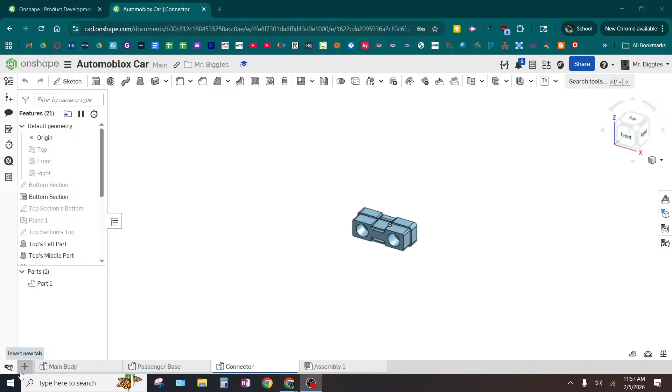So what we're going to do here is we're going to make a new tab.

So the passenger base, just to be clear, is this little plastic thing. The main body was like the section with the passenger. Some of you may have called it the passenger section. I'm going to call this the front section. So the main body, all right. You can call this next thing the front body or the front section. It doesn't really matter, but it's the front of the car.

So I'm clicking here, this plus sign, create part studio, and we can call this whatever, but it is the front of the car.

Okay, and I do want this to be oriented like this, where when I have it in the default front, right, top, I guess almost like corner of the view cube, it's in its natural position like this, where this would be the front facing part of the car, this is the side, this is the top.

So I want to do the same thing with the front section, and so it's very important if we do that, we're going to draw this initial sketch on the right plane. We're basically going to draw that profile. We're going to draw that shape, and that shape will then extrude, and that's going to give us the front of our car. So I'm going to make a sketch on the right plane.

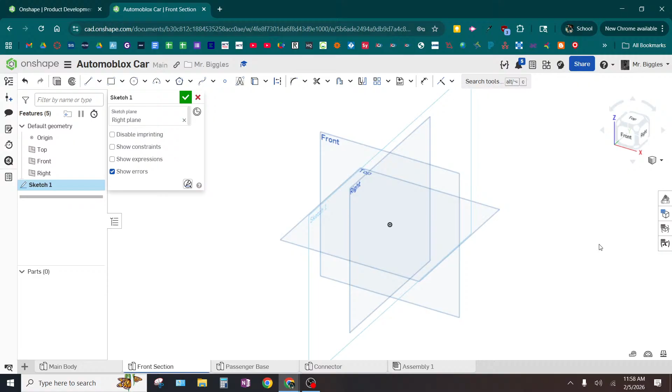Now, I want you to just kind of look up here and watch. I'm going to show you a variety of different ways you can do some cool stuff. Most of your cars, if not all of them, probably have some curves on the front section. So what I'm going to do is I'm going to show you some different ways to draw curves, and then it's on you to kind of make that work out.

For me, I got the bottom as flat. So what I can do is I can draw a vertical line, and I can draw a horizontal line. Easy, that's done right there.

Actually, I would have you do this. Draw your vertical line at a minimum. The height of this - what is the height of this? Measure it, get a number. But I want you to go check this because it should be the same height as this.

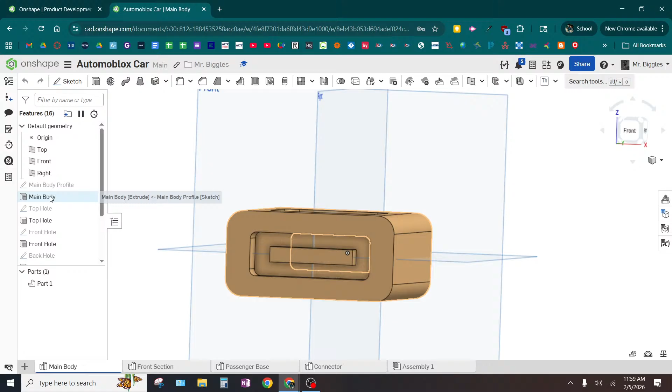In fact, for me, it's pretty close. I got 38 and a half, and that one was 39. So you know what, I'm going to just go with 39. If you want to make it the same number as this one, sound good? So I'm going to go make that the same height.

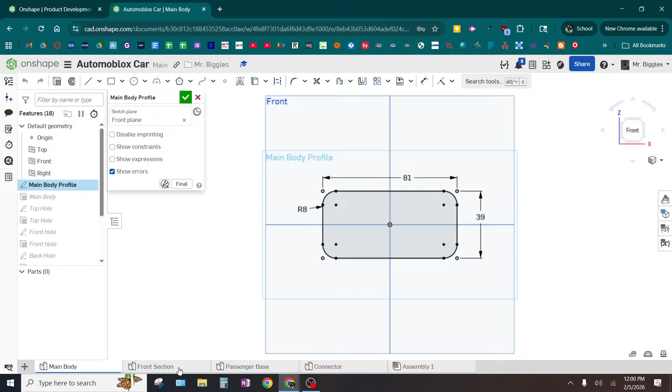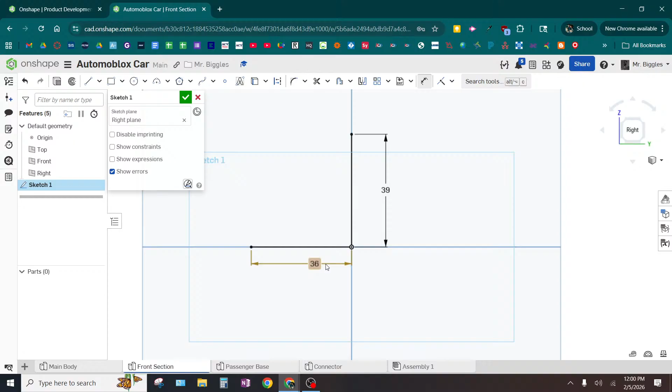If you have a flat bottom section like mine, you can draw that out and measure it as well. Not all of you have that though, so I understand if that's not an option for you. And for me, that looks to be about 36. Okay, we good so far? If your bottom is not flat, then don't draw it.

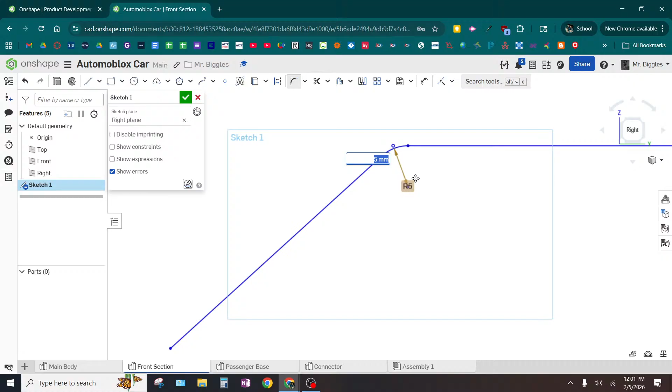There's a variety of ways you can do curves. We've already talked about fillets, where if you have like a corner, doesn't have to be a right angle, by the way, any corner can do a fillet. So you could draw - I'm just going to go over here to draw some random thing. You could draw like an angled corner like that. This fillet still works. You can still do a fillet on a corner, even if it's not 90 degrees.

In fact, my computer froze - awesome. In fact, you can even do it on acute angles. You can fillet an acute angle as well.

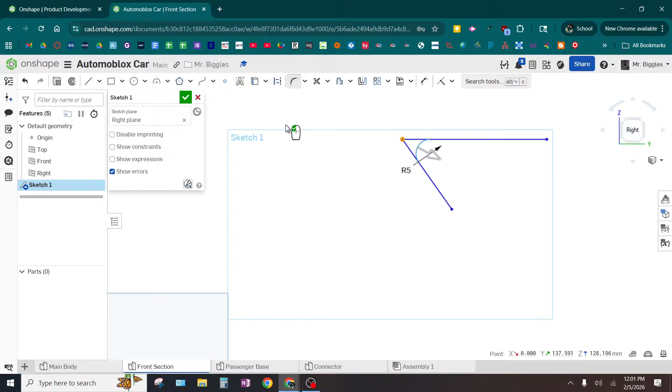Other ways to do curves - you're aware of the circle tool, but there's also the arc tool, so you can draw parts of a circle. So let's say that I wanted to do part of a circle going from here to here.

So I have 3 different types of circular arcs. Typically, you do the 3-point arc or the center point arc. So like I could do the 3-point arc - there's the end of one side, there's the end of the other side, and the third one adjusts the curvature size.

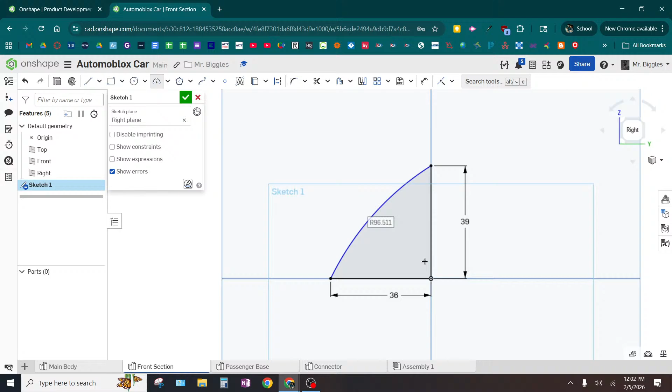Certainly could do that. The problem with that is that is now exactly circular though - it's a part of a circle. And your curves may not be perfectly circular. So we have another option - just as you can draw ellipses with the circle tool, you can also draw elliptical arcs.

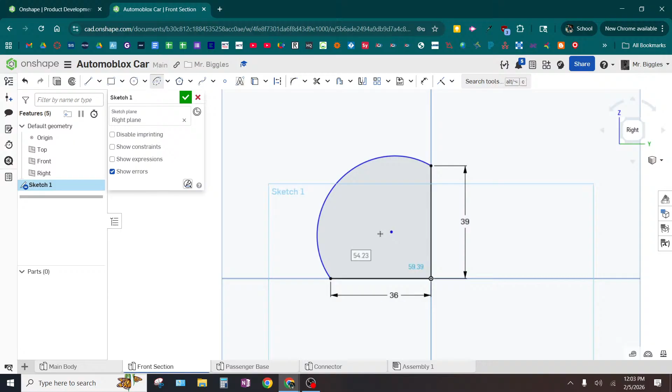It's a little bit more complicated doing an elliptical arc, but it can be done.

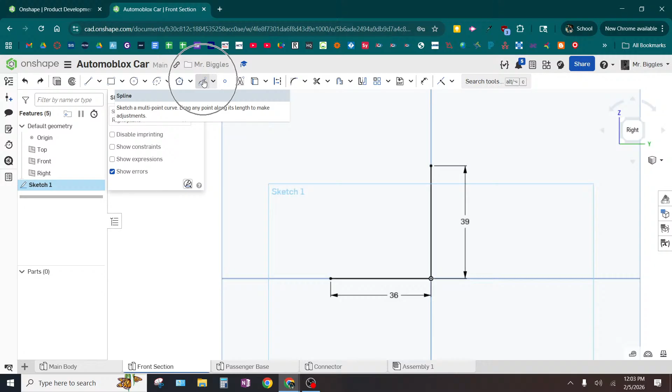The last thing I'm going to show you is the most interesting and exciting, and that's the spline tool. So the spline tool is right here. I'd encourage you to just play around with it.

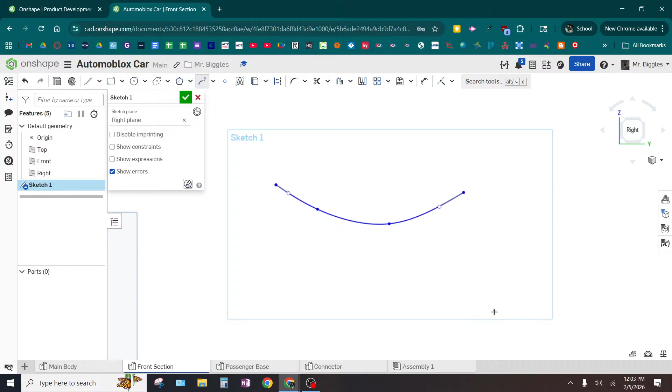Basically, every time you click, you make what's referred to as a vertex or control point. See how it's kind of smoothly curved? If you want to draw and finish it, you click to place a control point, and then at your last control point, you can double click and that ends it. You can also move these control points around.

Now, if I want to adjust the exact curvature of this, I can adjust each individual control point. If you need to add control points, you can click on the drop-down arrow, Spline Control Point, and add more. And of course, if you have one you don't need, you can click on it and delete it.

Questions about the spline tool?

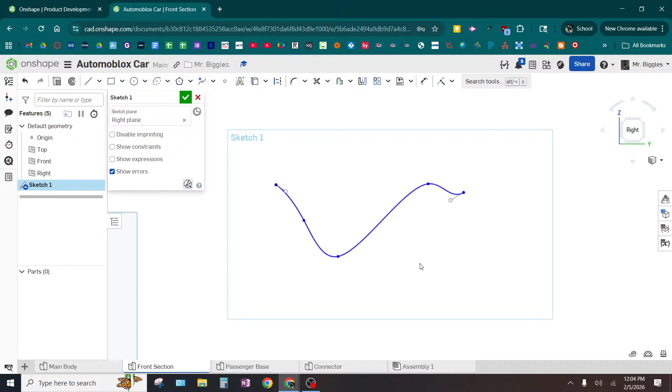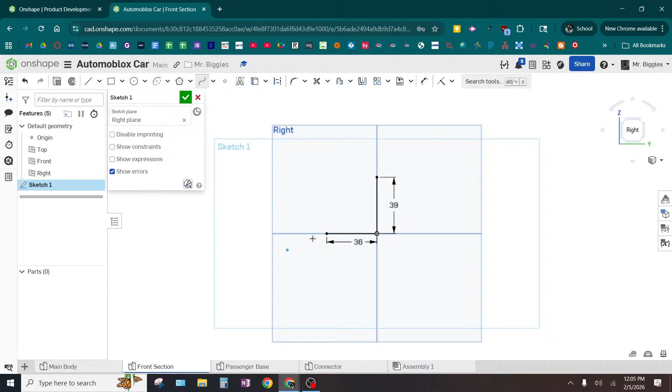So I'm going to try and do the spline tool here and show you a way to do that. My car goes like up, and then like that, and then like that. So I did 3 control points.

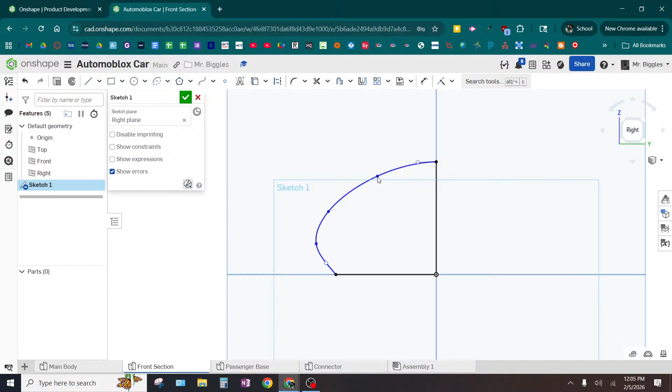And you can kind of move those around to get the desired shape.

The tricky thing with this is dimensioning it. How do you dimension this? It's kind of tough, isn't it? I know that there's kind of like a point that's furthest out, so to speak. So what you can do...

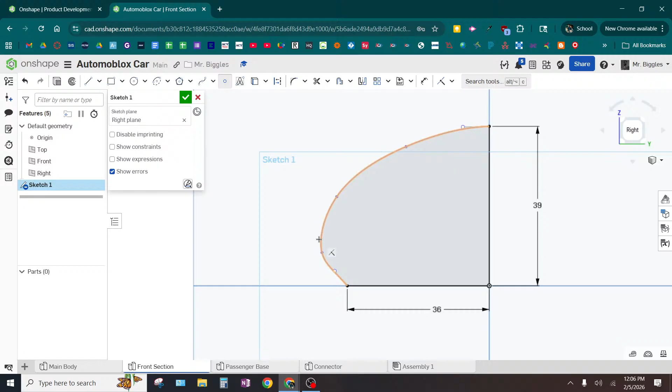...is you can dimension to these control points, or you can put a point on here, any point, and dimension to it. I'm going to show you a pro tip here, but it is a little complicated, and it works, but it might not be your cup of tea. I want to make a point that's on the furthest edge possible. Make sense? So I'm just going to place it kind of close to where I think it is. Are we good so far?

And then what I'm going to do is draw a line that goes perfectly vertical. We good so far? Why do I have the vertical line?

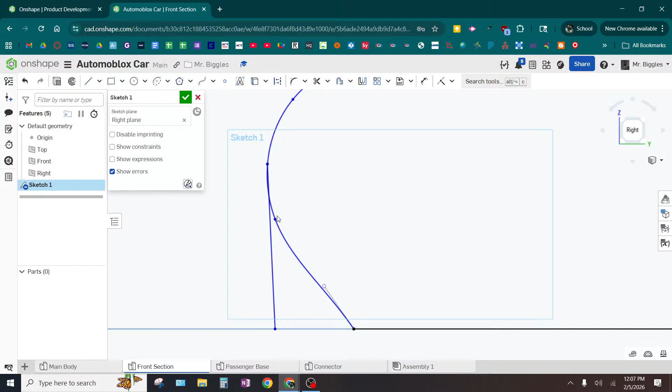You're going to have to trust me on this. What I'm going to do to ensure that this point is at the furthest place on this curve, I'm going to make this vertical line tangent to the curve. Wherever that vertical line is tangent to the curve, by definition, by geometry proofing and all that stuff, you could prove that has to be the furthest point out to the left. Make sense? Hopefully, yes, maybe, possibly.

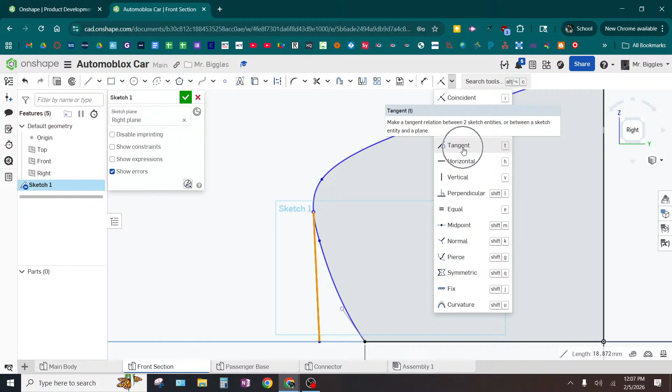So what I'm going to do is the tangent constraint. There it is—it makes a line tangent to a curve. And I'm going to apply it to this curve. I already had that line selected, so I only have to click one time. I'll show that again. I've got show constraints on. I'll click on tangent, and you can select this line, and then select this curve.

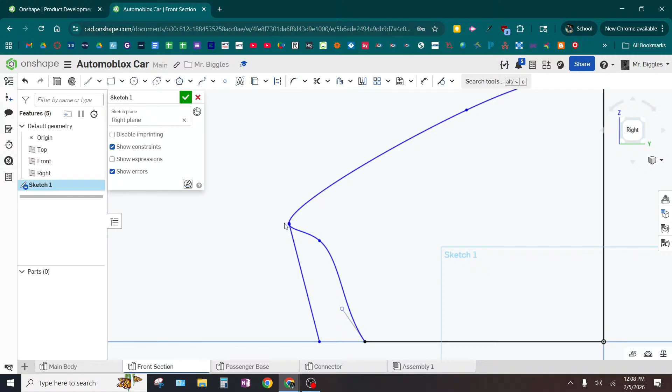By doing that, no matter what I do here, that line will always be tangent. Sound good? And then, one thing that might be helpful is making this line vertical, or else that's not actually going to be the tangent line, and also the furthest part to the left. Do we have questions before I continue?

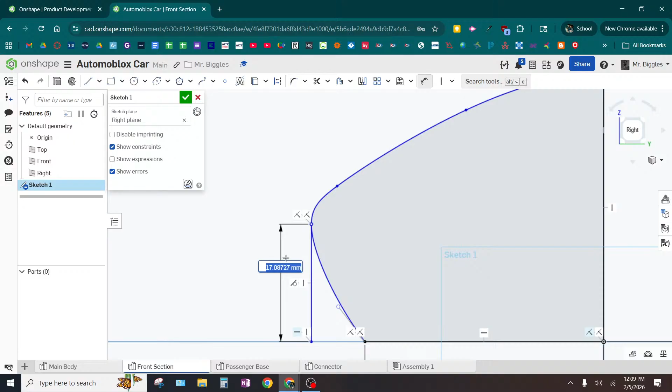So you can use the dimension tool to pinpoint that location. I used calipers to measure up to that point on the front part that sticks out the most—how high up was it from the bottom. I can also measure the maximum width. Yes, maximum width, just like that.

You see what I'm doing here? Just like we measured circular sizes. So I'm looking at about 11.

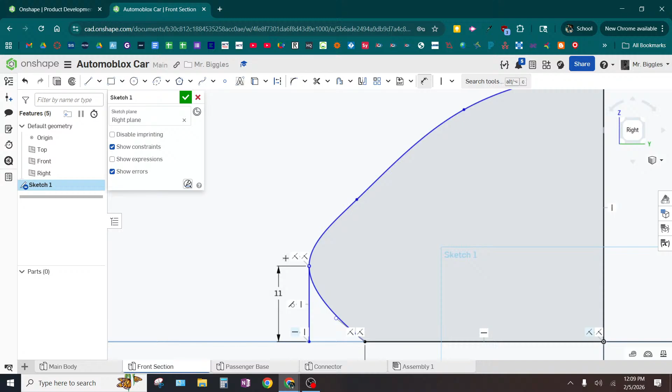So I kind of got the leading edge of that curve there. Are we good so far?

Normally, I would say you don't want to have any blue in your sketch, because that means you have some things that aren't fully constrained by dimensions or constraints or a combination thereof. In other words, I could do exactly what you did but get a different sketch because it's not fully constrained. You get what I'm saying? It's the same dimensions, same technique, but a different result, which is not good.

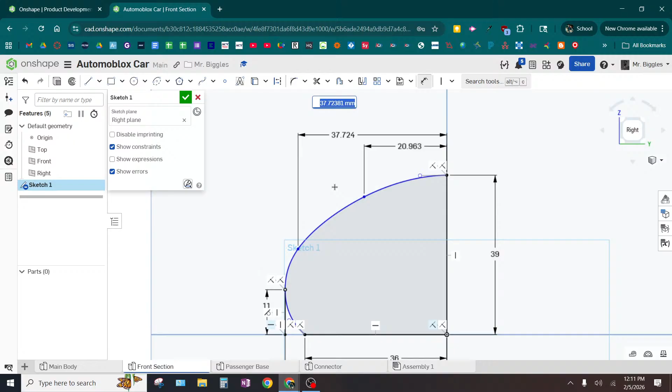Like that. And now lock them in place. And then this white thing—there's no control point after the end point—so the white thing kind of indicates the angle that this makes. I could even dimension to that, believe it or not.

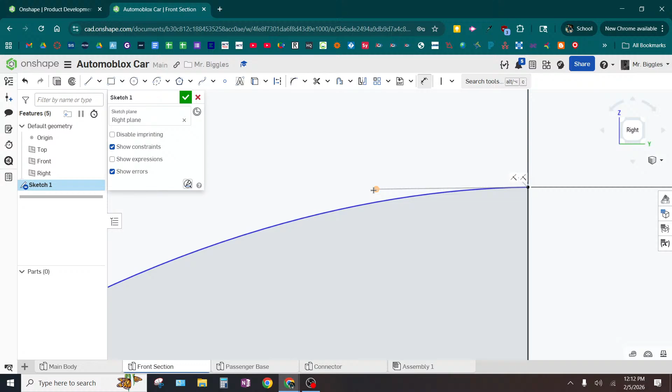And I could do it up here too. For this one, maybe I put a horizontal constraint. Why did I do the horizontal constraint? Because this top part is going to smoothly go into effectively a flat top, right?

Because it just continues off flat into the next section. So I have everything black, but I didn't really measure these dimensions that lock these control points in place, because I don't really know where they are exactly. I just got it to be black so that it's all fully constrained. So if I click and drag, it's not going to change. You do you on that.

If you have any questions? I'm going to give you a little bit of a moment here to play around with your arc tool, your elliptical arc tool, your spline tool, to see what you come up with for your forward section. You might find it really easy, you might find some challenges. One thing I always point out is, since you're all learning CAD, I wouldn't focus on necessarily being 100% perfect or having every single detail if you're struggling. Just go for the basic shape outline with a technique that you know, and we'll go from there. I'll give you a few minutes, not a lot of time, because I do want to move on and show other things. Meanwhile, I'm going to go watch a cat video.

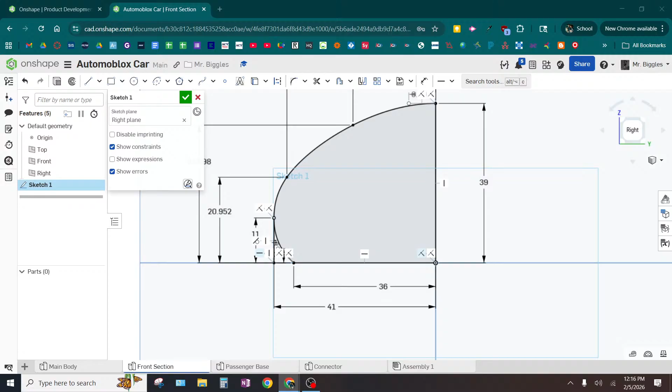How are we doing, boys? Are we maybe ready to move on? Yeah, maybe, possibly. Let's do it. Let's do it. You can finesse this on your own time.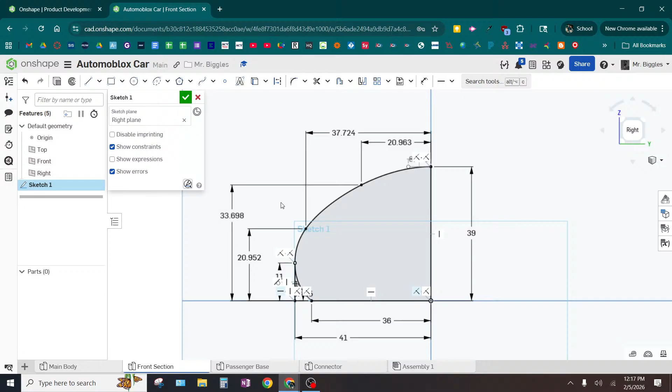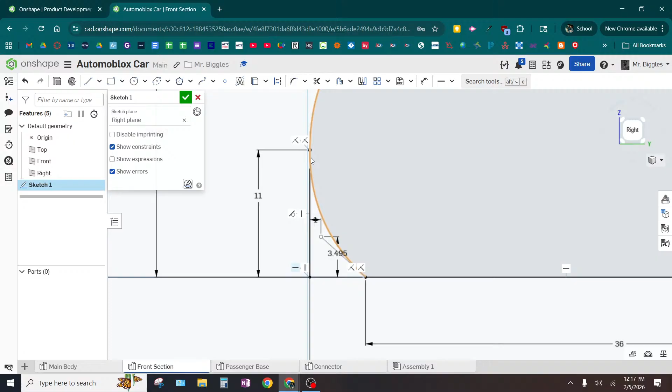I've shown you a technique to dimension to the peak or extremity of a spline. You put a random point there, then draw a line that's vertical or horizontal, and make that line tangent to the curve. That allows you to dimension to the most extreme point of the curve, okay?

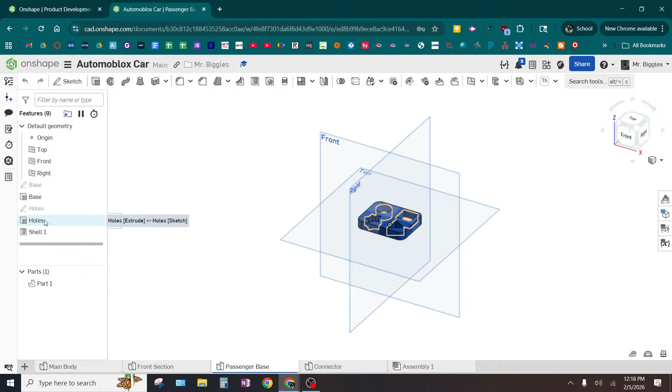Before I move on, if you ever do a line like this, or this technique, you probably should make it a construction line. Construction lines have a dash aspect to them, you can see that dash part there. This is very similar to the star in the passenger base, where the circle and the pentagon and the other circle were all dashed construction lines. So they're not selectable when you do extrusions.

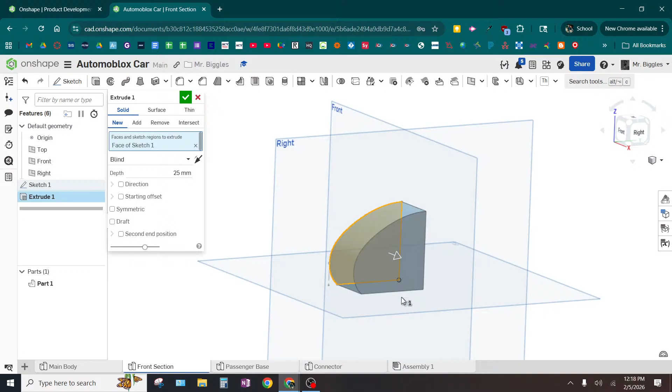And then I just extrude this. Now, I would recommend that you do a symmetric extrusion so that it goes both ways, equal distances across this plane. Sound good? You still type in the overall width, you don't need to do any math like divide by 2 or multiply by 2. No, you could just take the width.

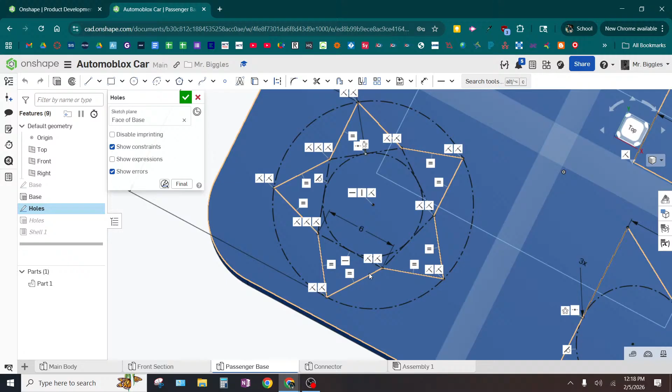Now I can measure this width. I got about 81, but I'm going to go check what I got the last time I did this. I got 81 that time too, that's pretty comforting. So I'll make this 81.

That symmetric part of the extrusion is really helpful though. Notice now that the right plane cuts it in half. We good? Yeah? Possibly? Maybe?

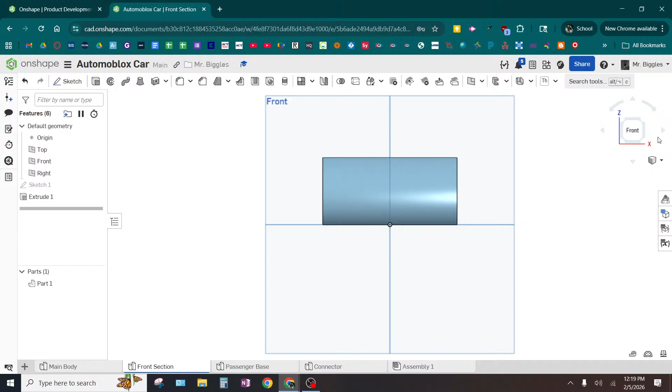I'll put this at an angle. When you see the front, top, and right plane, your part should look like it's oriented in that way. Now, an astute observer might notice that these edges are rounded. Do we see that? Yes, say yeah. Yeah, we see the edges are rounded. How would we do that?

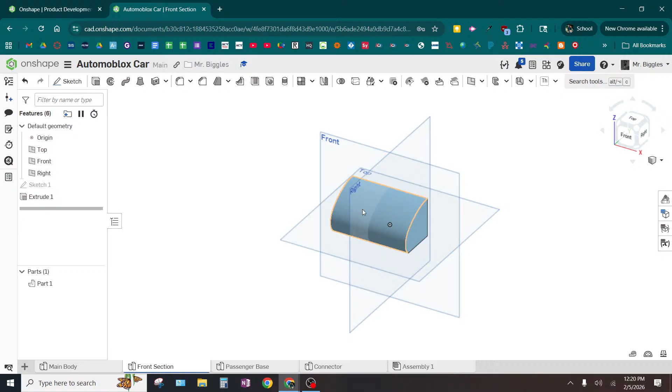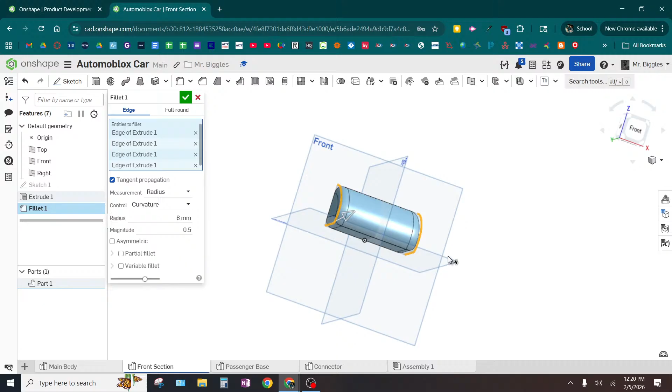Fillet it, there it is. If I go to my main body, I can see the exact size of that fillet actually. Oh, looks like I used 8 before. So I go here, fillet, make it 8. I can click on that to the bottom, that, the bottom. And that checks out, that checks out perfectly.

Now, there's different ways you can do what are basically divots for the headlights. So you see these little divots, right? They look like scoops. If I took a circular shaped tool, I could scoop out that hole. Yes, say yeah. So I'm going to show you a technique that you can use to create those.

We're only going to do one side. Why only one side? Because we can mirror the other one, right?

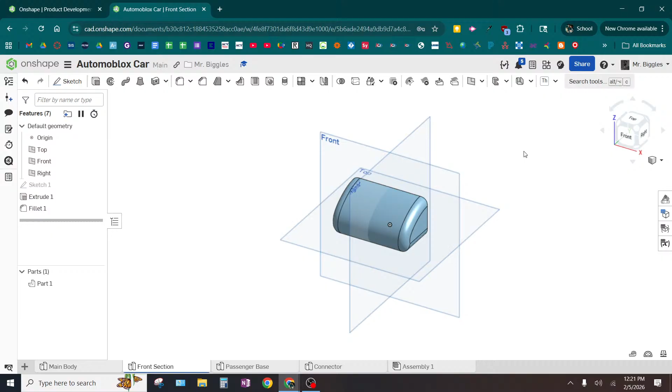This is a little bit more of an advanced technique, but I'm sure you'll manage. I'm going to show you 2 different ways, well, 1.5 different ways to do this. Sound good?

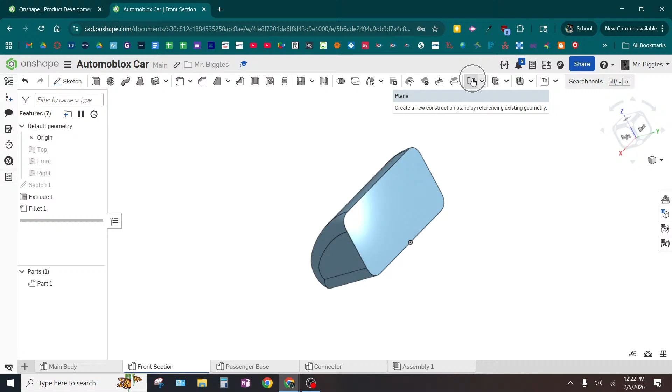What I'm going to do first is hide all these planes because they're going to get in my way, and I'm going to make a plane. I'm not in any sketch, so I see all the features up here rather than sketch tools. I'm going to click on the plane, and click on this, and that creates an offset plane, but I don't want it to go that way.

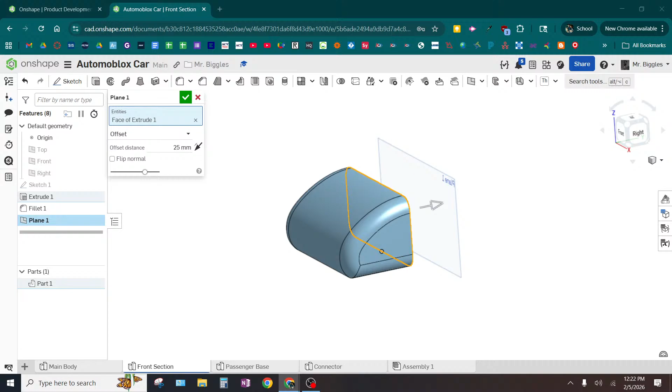How would I change what way it goes? Remember how we changed the direction of anything? Same thing with extrudes or stuff like that. The arrow, yeah. There's a black arrow right here. You can click on that and it changes the direction.

I don't have an exact distance for you that's necessarily perfect, but what I'm going to basically do is on this plane, draw circles and then drill into the wood like this. Think of a circle—I'm going to do a remove extrude into the wood. You can kind of ballpark where the leading edge of those headlights are if it helps.

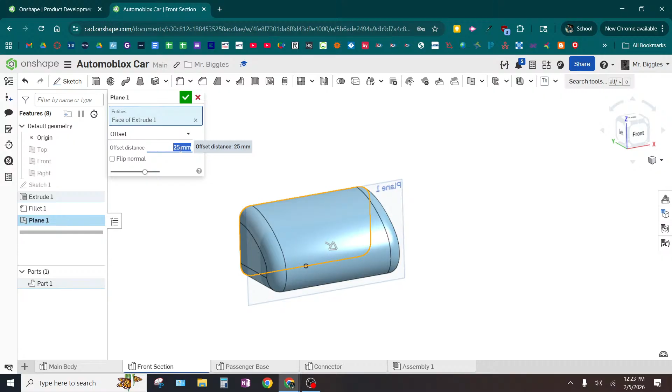I'm going to go with 37. So I've made a plane that's 37 away from this flat surface. We good so far?

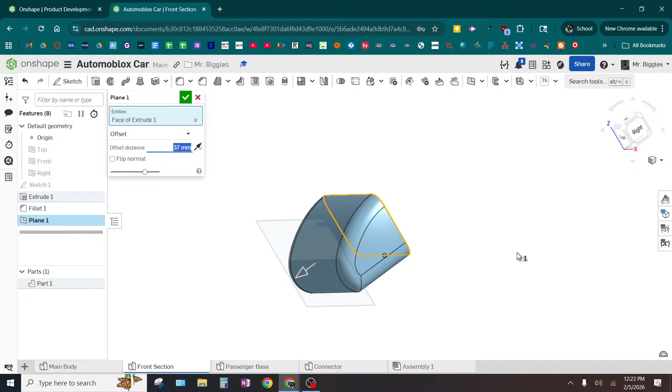All right, if I want to do a headlight, what I can do is just draw a circle. I'll put a sketch on this plane.

This is starting to get into very personalized stuff—how many lights there are, the exact size of them. If you want to take a little bit of academic freedom here, you can. If you don't want to religiously stick to the exact dimensions of the front of your car, I'm okay with that. I'm here to show you how to do techniques. It's not really about making this car 100%, okay? We don't need CAD replicas of this car.

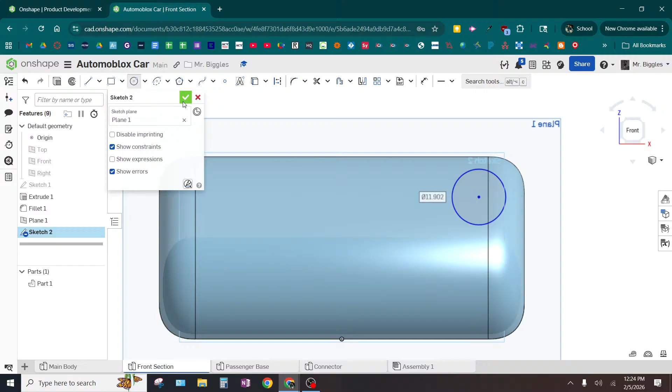So I kind of drew a circle there. I'm not even going to dimension it—you could dimension it, I'm not going to worry about that. And then I can just extrude and cut into however far I need to go.

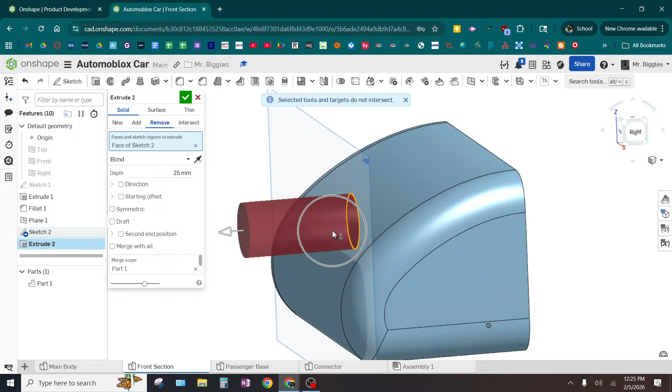So what I'm going to do is choose remove. If it shows this red issue because it's going the other direction, just click the black arrow, okay? You can kind of go in as far as you want. It does show a preview approximately how far it goes. You can click on the arrow to drag it some, all right? But there's my headlight. Sound good?

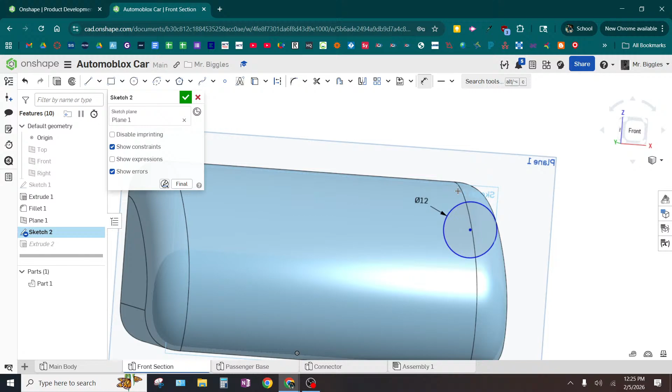Now I am going to make it a specific diameter—you'll see why in a moment. I just need to know the diameter. I'm going to make it 11... let's go with 12, okay? Don't quote that number, it's not special, I'll just go with 12. Nice number. If you look at your headlights, they're rounded in there, aren't they?

How do you think we could round that? Hold that thought. How could I round the bottom of that? We've already done this, by the way—it's a technique we've already done before. How do you round anything?

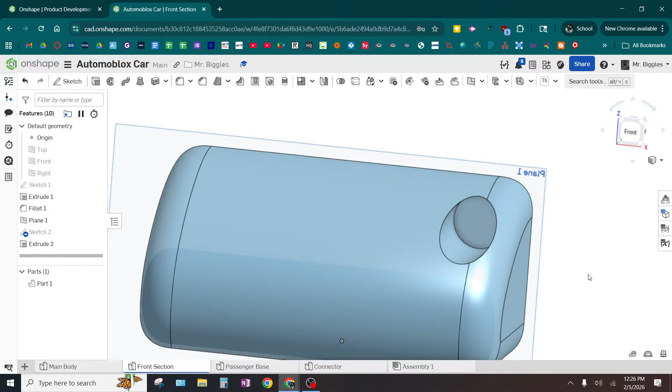Fillet it. So what was the diameter? It was 12, right? So I can go do a fillet really quick, and make it half that, which is 6. And I can click on the bottom, and I have a fillet.

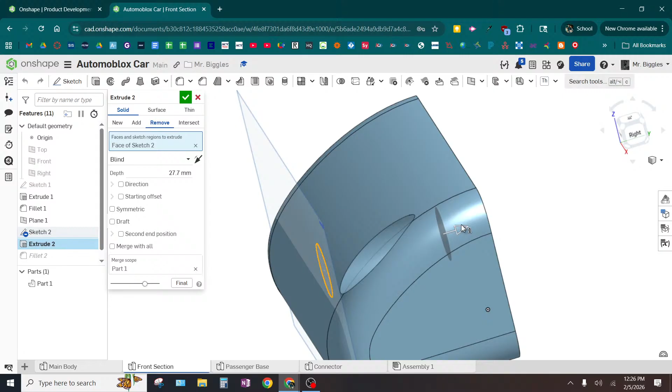The problem with this, I have found, is if that doesn't go deep enough, it won't be able to do the fillet right here, because it runs into the opening. That's the one downside of this. If I take this and go really far back, okay, that fillet should work.

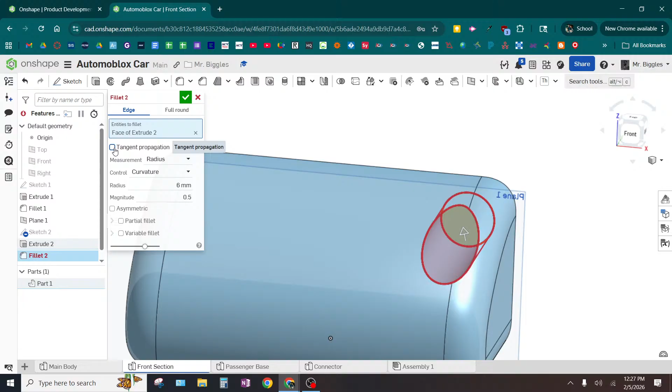I'm going to have to reapply it. I don't know what the magnitude does. Yeah, it's still not really working out. Oh well.

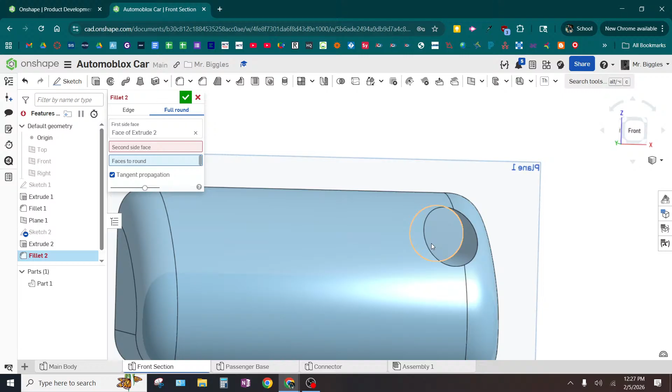It works in certain circumstances. You can do this—pull around. Oh yeah. So that's one option, but it's finicky. I showed it to you first because it used stuff you already know, but I kind of anticipated it wasn't going to work.

Second option though, and I'm going to do this one on the other side—I was able to get this asymmetric one to work though. That one did work.

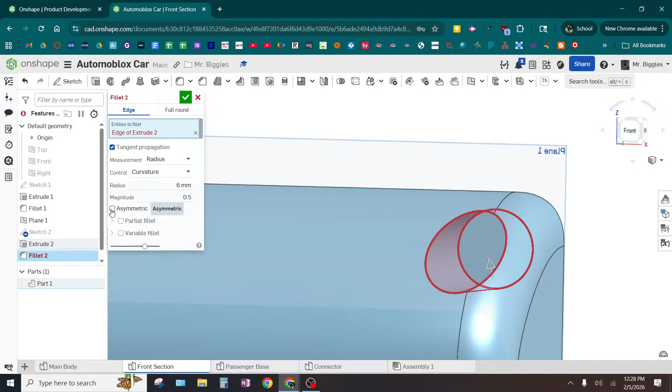If I make it like 5.9, that's pretty much almost perfect. There, it's rounded. Okay, so if I do it asymmetric and make it like almost exactly the same number, it seems to work.

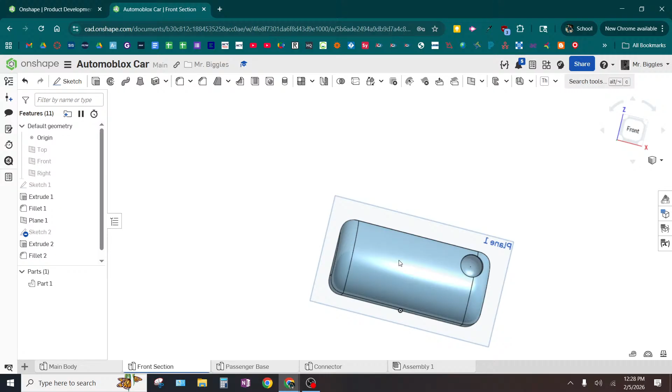That's one technique. All right, Alex, what did you say earlier? Revolve, yeah. So you can do a revolve as well. I'm going to show you how to do that, okay? But the way the revolve works is going to be a little bit different. So if I want to do the revolve, all right,

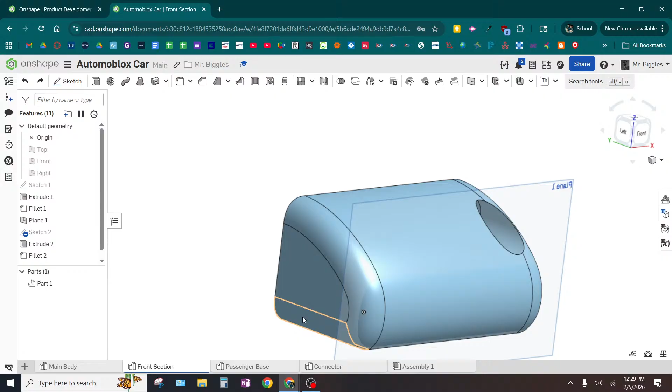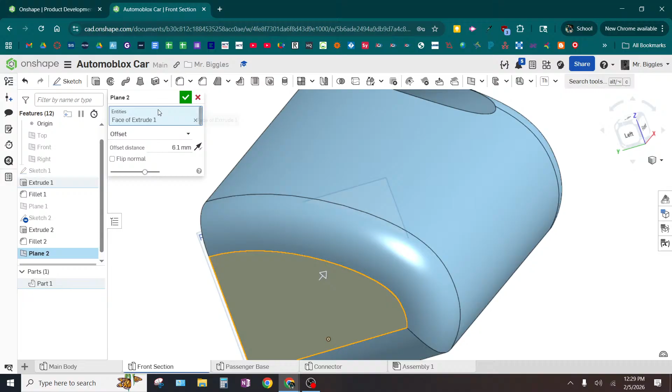What I would do is make a plane that's offset from the side and goes into—if you can see that blue line there sticking out—you can make a plane that kind of sticks out. You can think of it as basically cutting the headlight in half. That plane might need to go a little bit further in, or maybe go like there.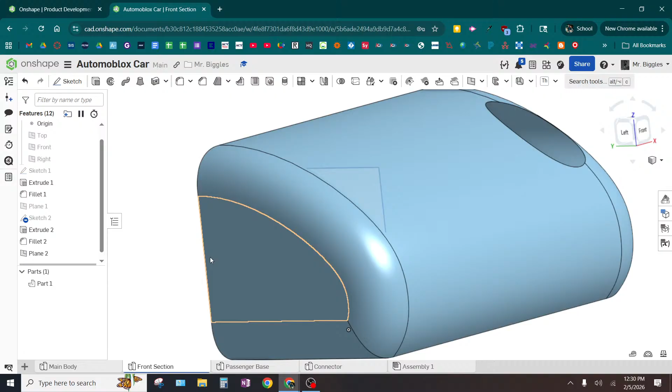And then what you can do is draw a rectangle and then a curved part, and you just rotate it and it carves out that cavity. I'm going to show you how to do this. If you have a hard time visualizing it, I would just pay attention to what I'm doing here.

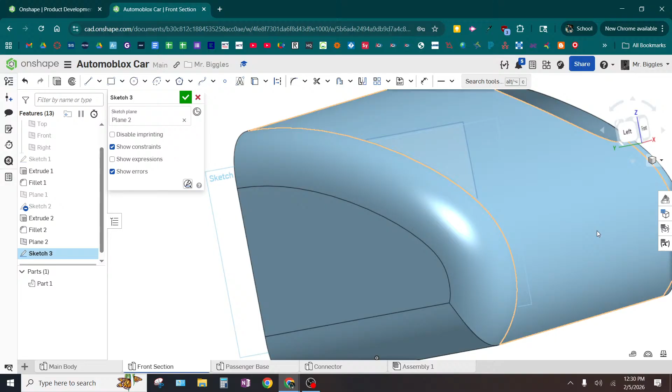Okay, so I'm going to sketch on this plane. Keep in mind that this plane has kind of cut into my shape, right? Yes, see? Now, do you guys remember how I can make the stuff blocking it go away for a little bit? Remember, we did it with the connector piece. I kind of got this edge blocking what I want to draw here. Do you remember how to make that go away?

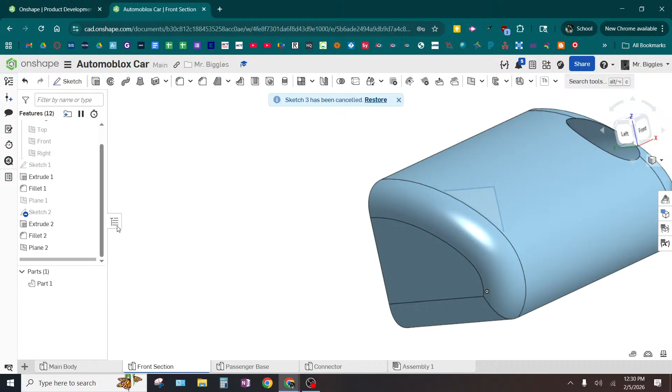It was... section view. Yeah, very good. So I can right click on this plane here and choose section view. Okay, makes it easy to see. And I can sketch on that plane.

And what I could do as just an example, I could draw like a rectangle like that, and then put a little circle on the end. Sound good? Yeah, we're good so far, maybe possibly. You might like to draw the whole shape and rotate it 180 degrees, or you might like to draw the half shape and rotate it 360 degrees. So I could do this center point arc.

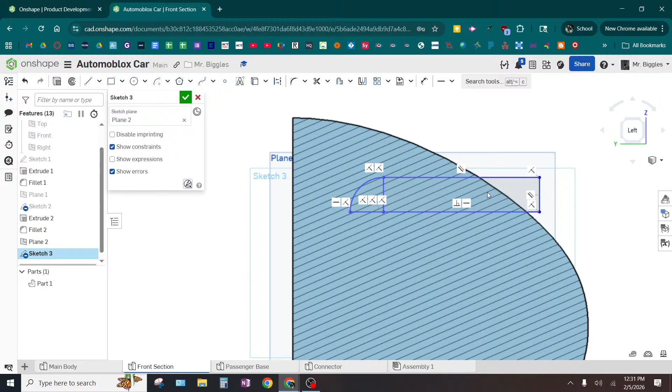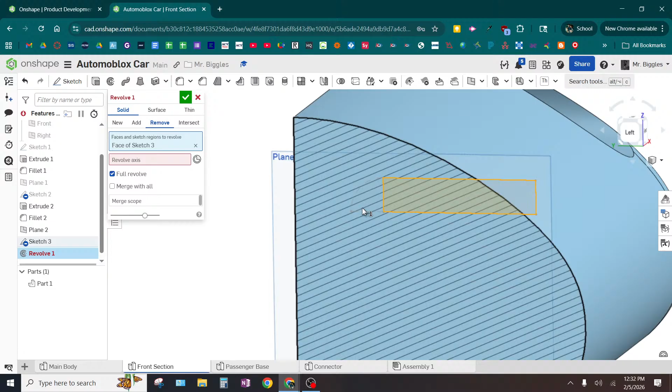If you're like, you're going too fast, this is what the stream is for. Okay. But I got this shape now, all right? You either draw the whole thing or half of it. And then, instead of extrude, we'll use revolve. I am removing stuff, but you can add stuff too. And it says face and sketch regions to revolve. I would click on this. It's not letting me choose this circle.

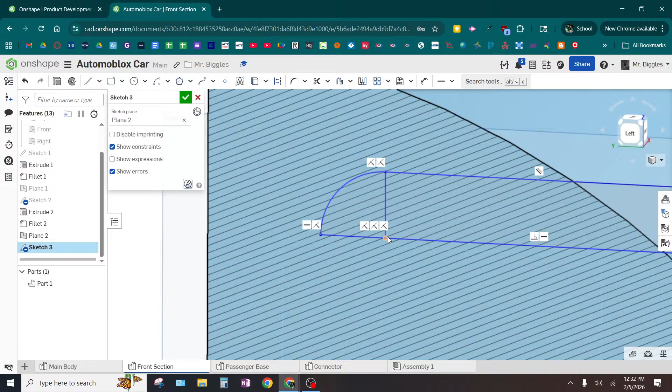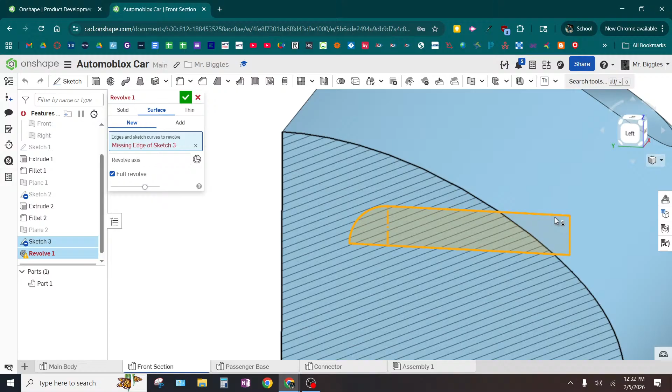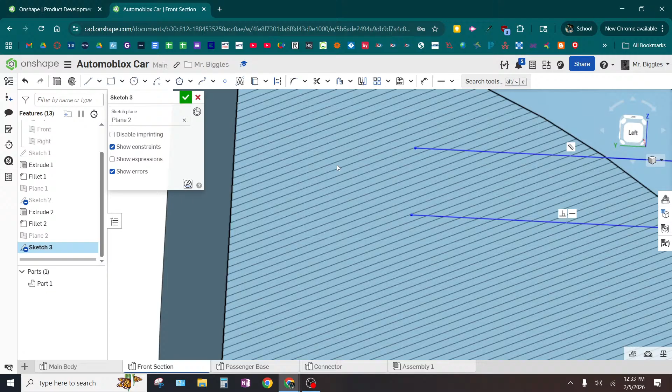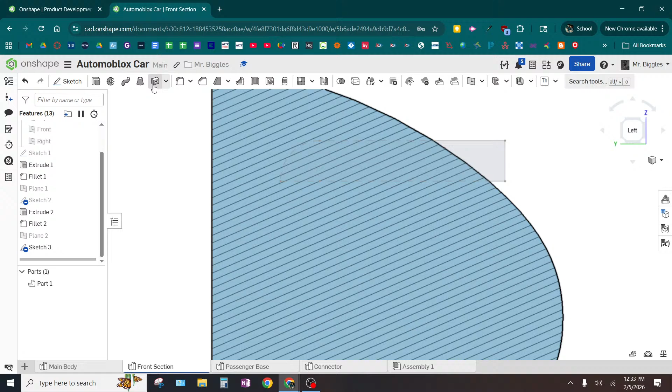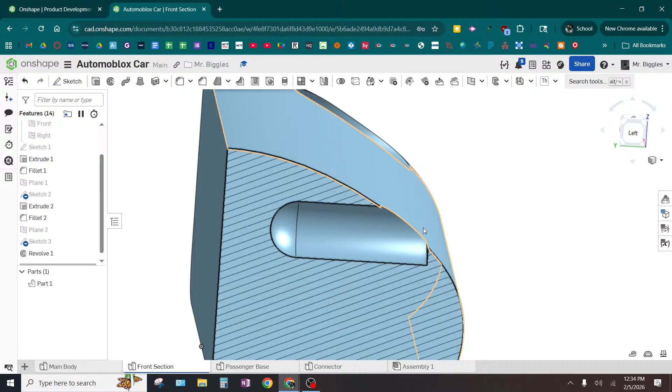And I can do revolve, and I can select that. The revolve axis, I could choose this bottom part. And it's going to cut the whole thing out. So notice it kind of cut out that whole cavity.

If you aren't careful, it's easy to not have your rectangle go far enough. That's an easy fix though. You can't go too far, you can only go not far enough.

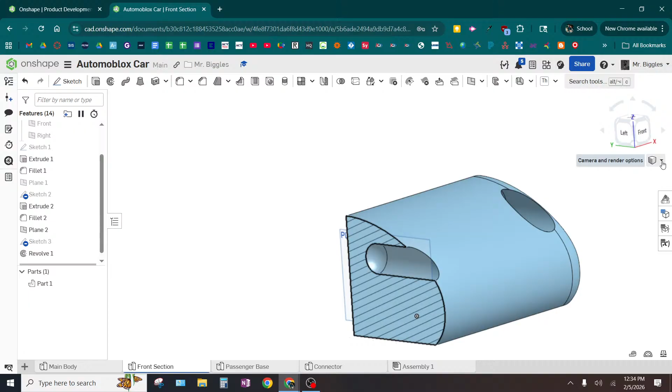Do you remember how to get rid of section views? The surefire way to do it, if you don't remember which plane you did it on—right click on it, and then... you can right click on it. If you remember the plane, you can right click on the plane, yes. But what if you don't remember where you did the section view? So you can go to this camera and render options by the view cube, and turn off section view.

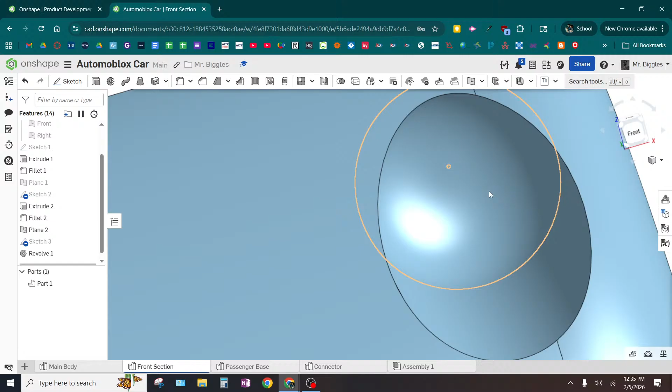And notice that I have a very nice rounded little headlight. Sound good? You can use your calipers to ballpark dimension these, but hopefully you've kind of seen two different ways here. As I showed with the fillet, I've run into this issue in the past—when you try to fillet inside there, it doesn't let you do it if it's exactly the full size. So you have to make it a hair smaller or make it asymmetric. I don't really know why it works that way, but that's how it works. But if you do the revolve, you can do it perfectly. I think the revolve is a little bit harder to do, but it does look better.

Do you guys have questions? So I've kind of given you guys a couple different ways to do the headlights. Sound good? At this point, I want you to play around with stuff. You should be able to do this part of the front section yourself—the plastic shape part that interfaces the connector piece. You should be able to do different headlights. If you want to do pinstripes, you can. Some of you have looked at doing those metal looking grill things or whatever, depending on your car. I'm going to let y'all cook on that.